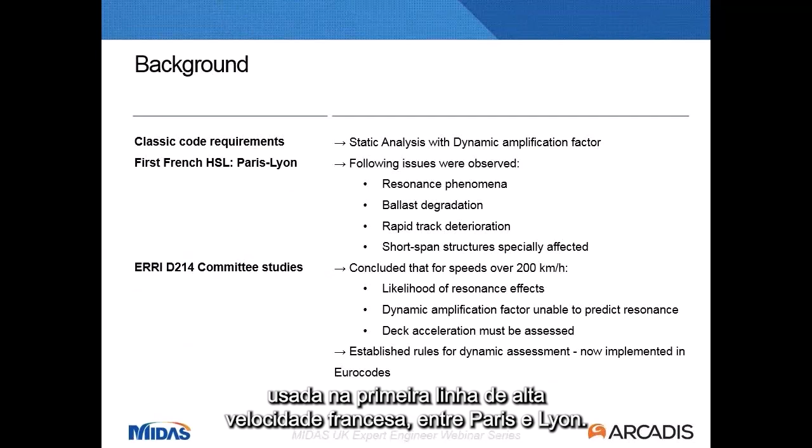This classic approach was the one used on the first French high-speed line between Paris and Lyon. When this line was put in service back in the 80s, some problems were observed in some of the bridges - they exhibited resonance phenomena, and the ones that did, it was observed that the ballast degraded very quickly. There was rapid track deterioration, and short span structures were the ones with more severe effects.

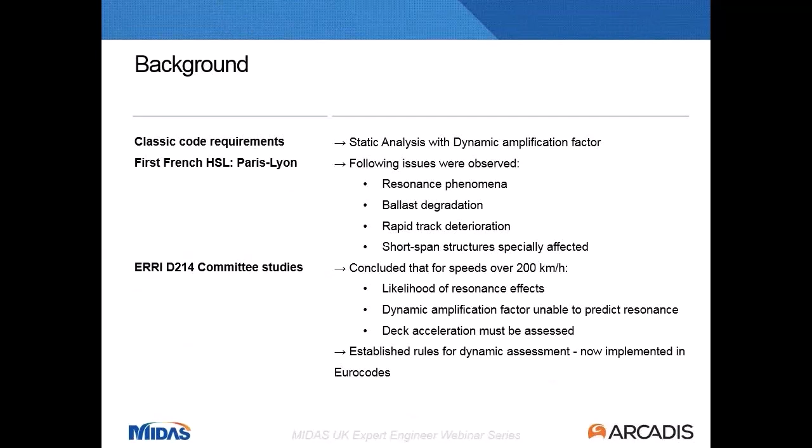In view of that, in a joint effort in Europe, a committee was constituted to study this problem. After running a series of studies and tests, they concluded that this problem is especially relevant for train speeds over 200 kilometers per hour - for speeds over this value there is a high likelihood that you will have resonance effects. And if that happens, using the classical approach of static analysis plus a dynamic amplification factor is unable to predict the resonance effects.

The other thing is that for these kinds of bridges, you need to check the deck acceleration. The committee also established a series of rules and guidance for doing the dynamic assessment of bridges, and these rules have now been implemented in the Eurocode. So what you see in the Eurocode is basically the conclusion of this committee on this particular problem.

What is the difference between when you have a line on ballasted track or on ballastless track? Well, these problems of resonance and deterioration manifest in different ways. If you have ballast, when the accelerations in your deck exceed 0.7 g, the acceleration of gravity, then the grains in the ballast lose the interlock between the grains, and they're not able to withstand horizontal and vertical forces anymore. If they don't withstand these forces, they are not able to keep the sleepers and tracks in place, and that leads to problems with track alignment, quick deterioration, and risk of derailment.

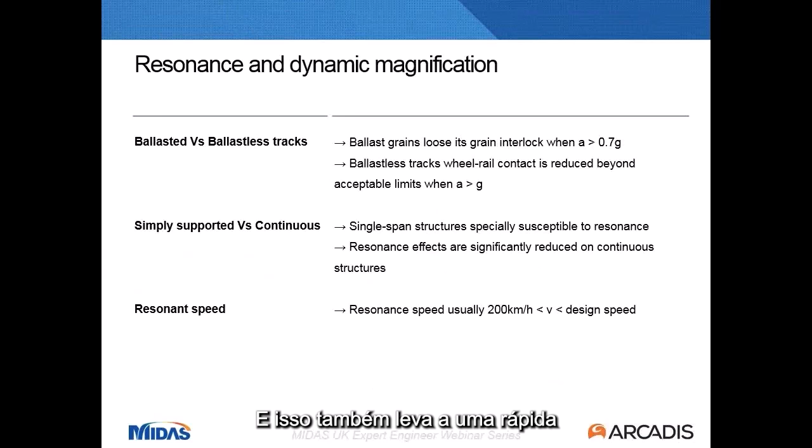But if you're using ballastless tracks, you don't have this problem with the ballast, obviously. But when the acceleration exceeds the gravity acceleration, then the contact between the wheel and the rail is lost, and that also leads to very quick deterioration of the track and as well to the risk of derailment.

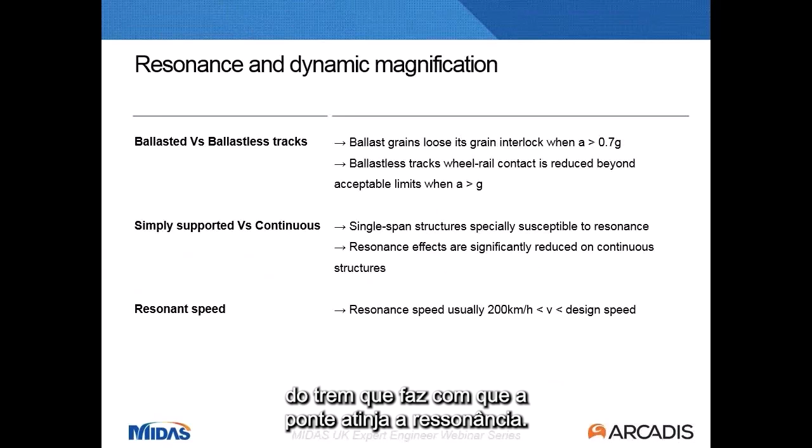The committee also concluded that there is a big difference between single-span structures and continuous structures. Continuous structures are able to reduce these resonance effects, but single-span structures are the ones that are severely affected. They also introduced the concept of resonance speed, which is the speed of the train that makes your bridge go into resonance. This speed doesn't necessarily have to be the high speed that your train can run over your bridge—it can be any speed between, let's say, 200 kilometers per hour and the design speed of the line.

Now, how has all this been established in the Eurocodes? I'm going to do a very quick review of the provisions in the codes.

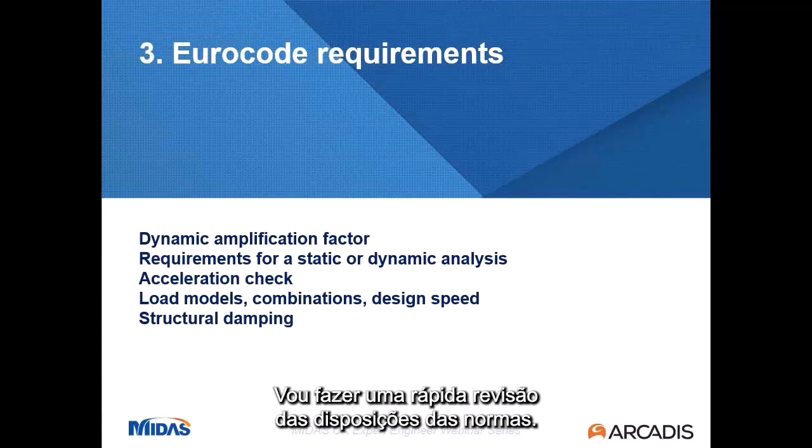So the first thing is about the dynamic amplification factor. The codes differentiate two different scenarios: one, when a dynamic analysis is not required, and another when a dynamic analysis is required. If it's not required, you can go with the classical approach. You check your structure with static moving loads, load model 71, model SW0, and if appropriate, you can use SW2. Then you multiply the results from this static analysis by the dynamic amplification factor.

That is a value that you can derive basically with parameters of track irregularities and a determinant length that depends on the element you are checking. If you're checking the main girders, it will have a determinant length; if you're checking some cross members, it will have another determinant length. With that, you're able to design your bridge without having to do any dynamic analysis.

But in some other cases, you do need to do a dynamic analysis. If that's the case, you still have to do your static analysis and apply this dynamic amplification factor. But additionally, you have to run another analysis—this is the dynamic analysis with different load models, the HSLM, the high-speed load models, and the real train that you're expecting to run over your tracks.

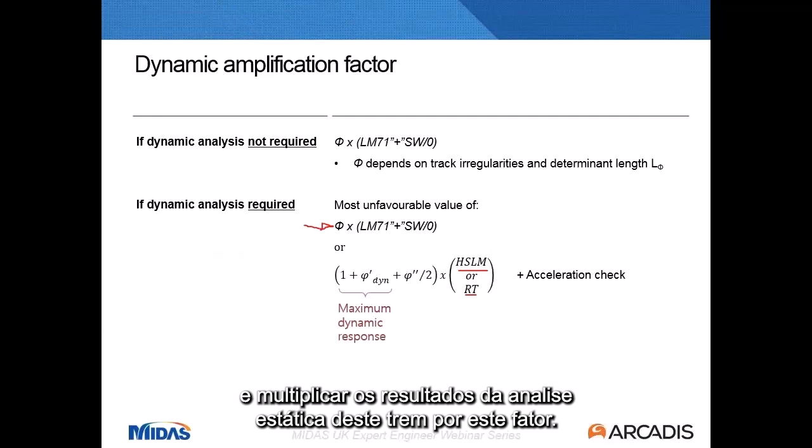That's a real train. Then you have to multiply it first by a value that is the amplification of forces and deflections due to the dynamic behavior of your bridge—this is the first term over here. And you have to multiply it by the maximum dynamic response. So you have to run a series of trains at a series of speeds, and take the most onerous one, multiplying the static results of these trains by this factor. You also have to include an additional parameter for track defects and vehicle imperfections in the equation.

So we have these two scenarios—when dynamic analysis is required and when it's not—but you might question now, how do I know if I need dynamic analysis? Well, the codes give you a nice flowchart like this one.

For the sake of brevity, I'm adding here just one flowchart from the UK annex, and that's the one for simple structures—structures that behave like a beam element between supports. There is another similar flowchart for complex structures, ones that do not behave as a beam between supports but have, for instance, grillage or orthotropic behavior, cable-stayed, or other more complex structures—you have to use a different flowchart. But this flowchart gives you some criteria to define if you will need a dynamic analysis or not.

Later on in this webinar, I will introduce a case study, and for this particular case I'm going to show you how to use this flowchart and determine if you need this dynamic analysis or not.

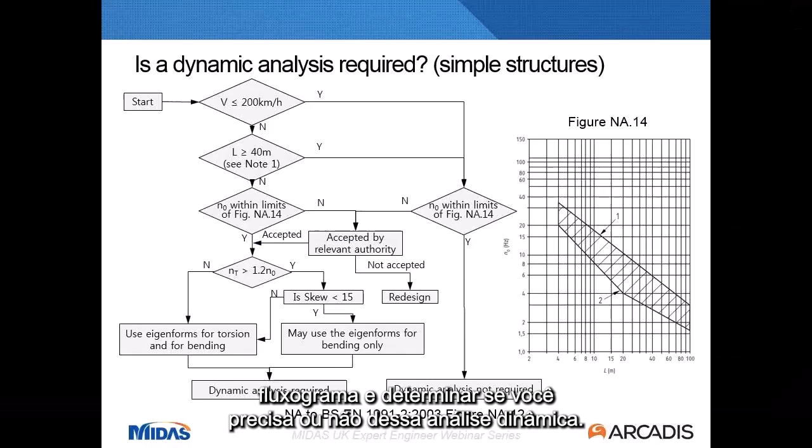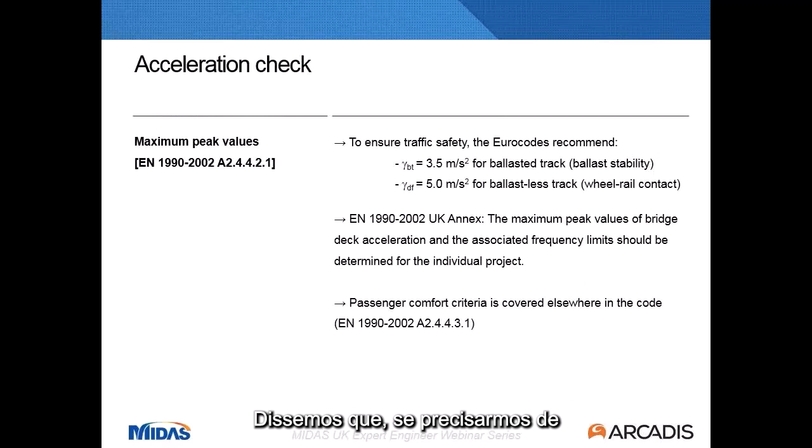Right. The accelerations check. We have said that if we need the dynamic analysis, we have to check the maximum values for the dynamic results, but we have to check acceleration as well. And which are the limiting values that the code imposes?

Well, the code recommends a couple of values, different values if you're with a ballasted track or a ballastless track. If your track is on ballast, the maximum acceleration that you can allow in your deck is 3.5 meters per square second. And that's to make sure that you don't have any problems with the stability of your ballast. That's basically the 0.7 G that we have seen previously with a factor of 2.

If it's a ballastless track, then you should use a maximum acceleration of 5 meters per square second. And in this case, is to ensure that the contact force between the wheel and the rail doesn't reduce beyond acceptable limits.

But these two values are recommendations from the Eurocode, and the UK annex from the Eurocode tells you that these values should be determined per specific project.

And another thing I think is worth mentioning is what we are talking here about is this amplification problem and the problems with safety and track deterioration if accelerations go beyond some limits. We're not talking about passenger comfort criteria. Passenger comfort is covered somewhere else in the code.

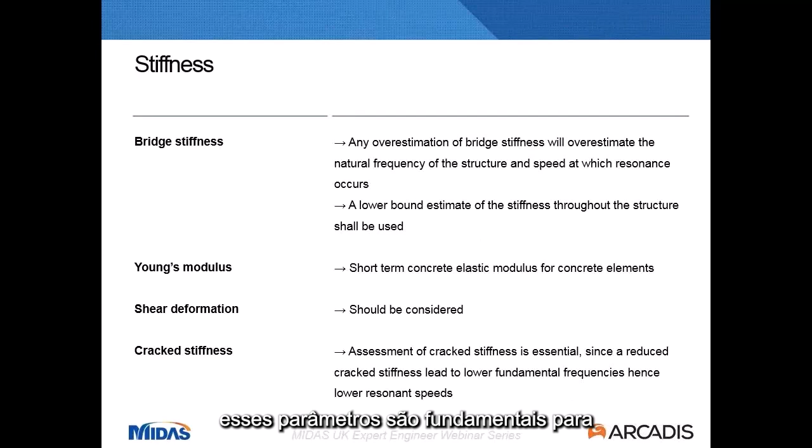Okay, let's jump now to main parameters for our analysis. That's stiffness and mass. As you probably know, these parameters are key for any dynamic analysis that you're going to perform.

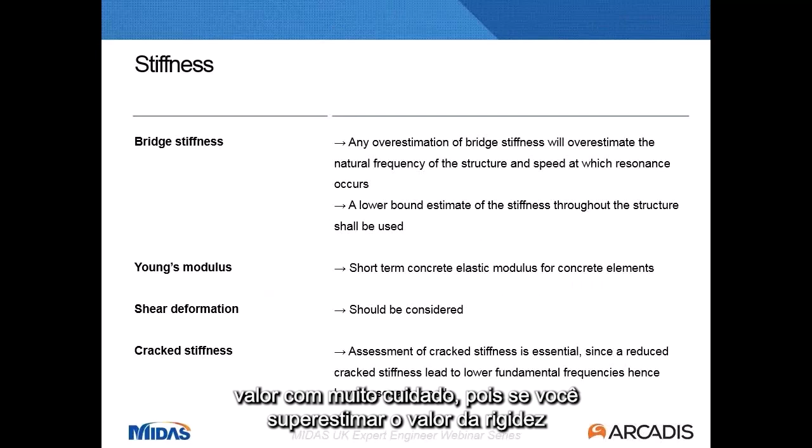And in this case, bridge stiffness, you should consider this value very carefully, because if you overestimate the bridge stiffness, then you overestimate the fundamental frequencies of your bridge, and you will overestimate as well these resonance speeds, and you may miss resonance phenomena. You might be underestimating the forces on your bridge, and that puts a risk in the safety of your bridge. So it's very important that you use a lower bound estimate of the stiffness.

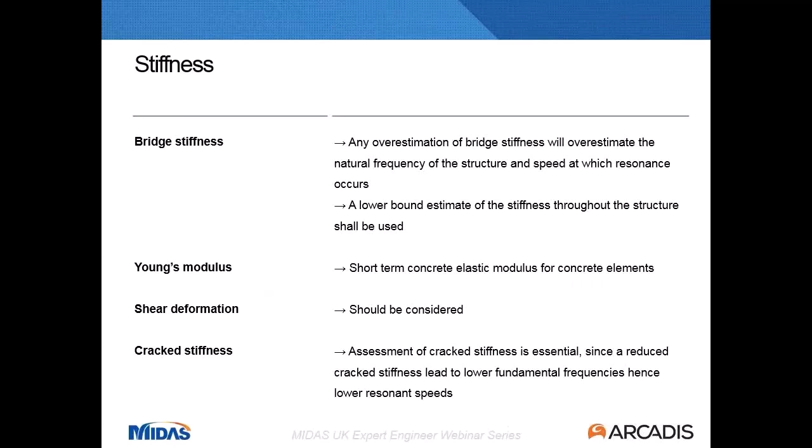Things like shear deformation, you have to make sure that you're considering shear deformation if you're using beam elements. And if you're using concrete structures that you allow them to crack by design, like a composite structure that you expect the top slab to crack near the supports, you need to model the cracked properties in your dynamic model. You cannot use gross properties, because then you will underestimate the resonance effects.

When we are talking about mass, then it gets a little bit more complex because you need to consider lower bound and upper bound of mass. The lower bound will help you to estimate the maximum accelerations in your bridge, and then when you're using the upper bound, that's gonna help you to define the lowest speeds that you can get resonance in your bridge.

So you have to run two different scenarios with two different masses to make sure that you're covering every possible situation.

For instance, in this upper and lower bound, when you have a ballasted track, you have to consider two scenarios for the ballast. One scenario is when your thickness of ballast is the minimum allowable in your bridge, and the ballast is dry and clean, so it has a lower density. And the other scenario is when you have an extra thickness in your ballast to allow for track lifts. So thickness is greater, and then you have to consider dirty ballast with a saturated density.

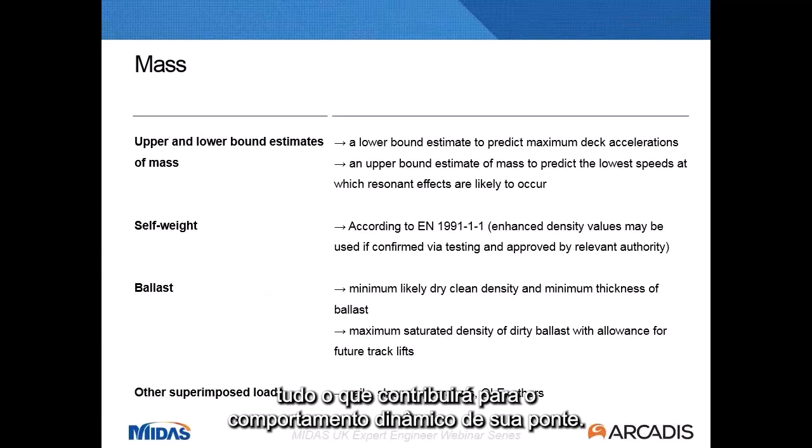And these two different values are going to give you the two different bounds for your mass. You also have to make sure that you're considering masses for everything that goes on top of your bridge, and that's the rails, sleepers, parapets, overhead electrification, everything that will contribute to the dynamic behavior of your bridge.

Okay, so after this basic introduction, let me introduce this case study. This is a very simple case that I think it's useful for understanding the basics of how to run this dynamic analysis. It's basically a 30 meter bridge, single span concrete box with the dimensions that I'm showing right now.

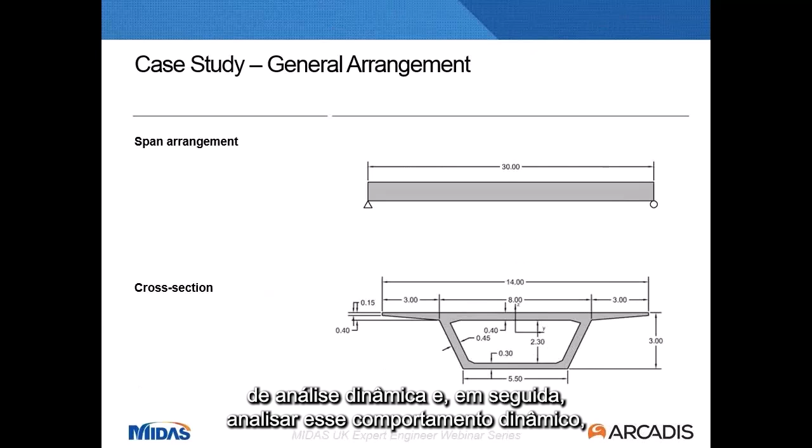So if we want to first check if we need a dynamic analysis and then analyze this dynamic behavior, the first thing that we have to do is go to this flowchart.

And you start by checking the speeds. In this case, we are assuming that's a bridge on a high-speed line with speeds up to 400 kilometers per hour. So we have to go down. We said that it's a 30-meter single-span bridge, so that's down again.

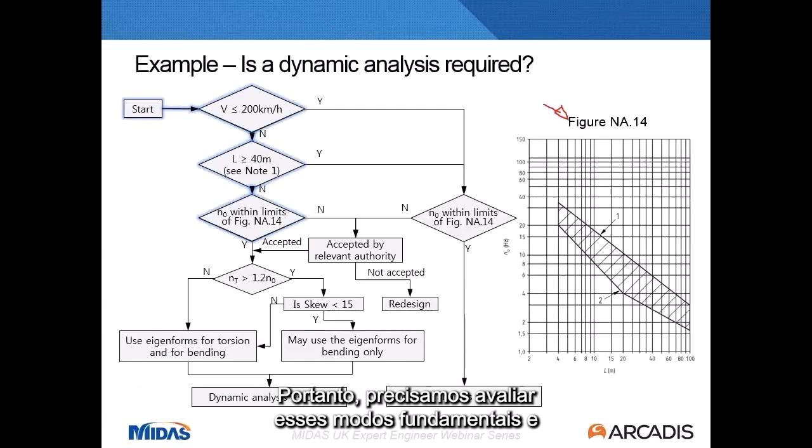The next check we have to do is to verify if the fundamental frequency is within the limits of the figure from the national annex NA.14 — that's the figure I just introduced on the right-hand side. So we need to assess these fundamental modes and fundamental frequencies to see if we are within limits or not.

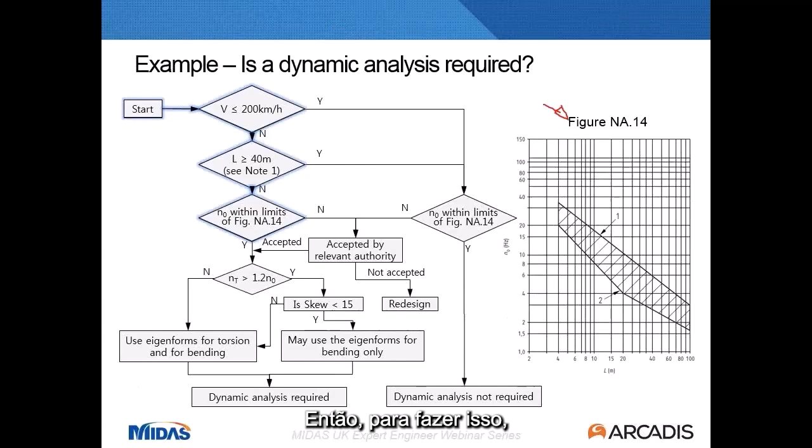So to do that, I've prepared a model like this one, a very simple one. It's basically a beam element representing this concrete box, 30-meter span, and I've subdivided the beam element with nodes every half a meter. My boundary conditions are simply supported on both sides, rotationally fixed because I'm assuming there are couples of bearings at each support, and the axial load is fixed on one of the ends. Just to show more or less how that looks, that's this section, and that's a 30-meter simply supported span.

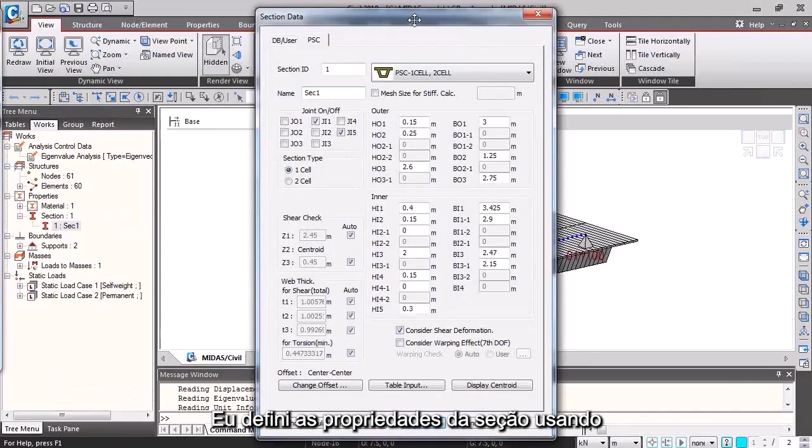I've defined the section properties using this menu in Midas, where you can define the sizes for a concrete box. It's very important that you tick this box to consider shear deformation, to make sure you're not overestimating the stiffness of your bridge.

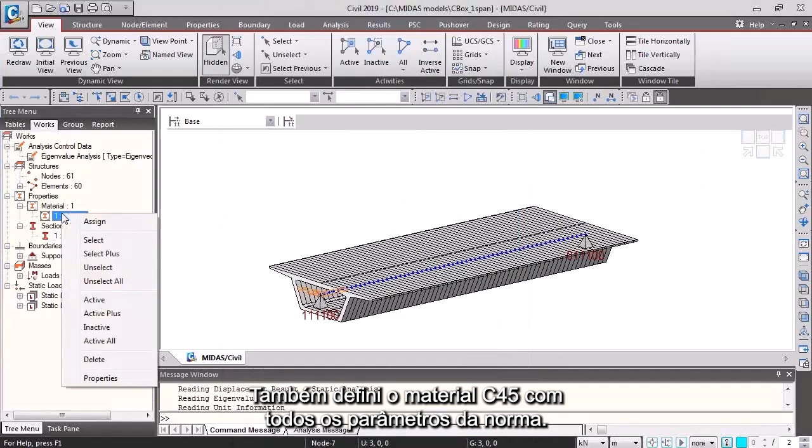I've also defined the material, C45, with all the parameters from the codes. And then I've included first all the loads that I have on top of the bridge: ballast, sleepers, track, parapet, everything else. I've represented that as a load.

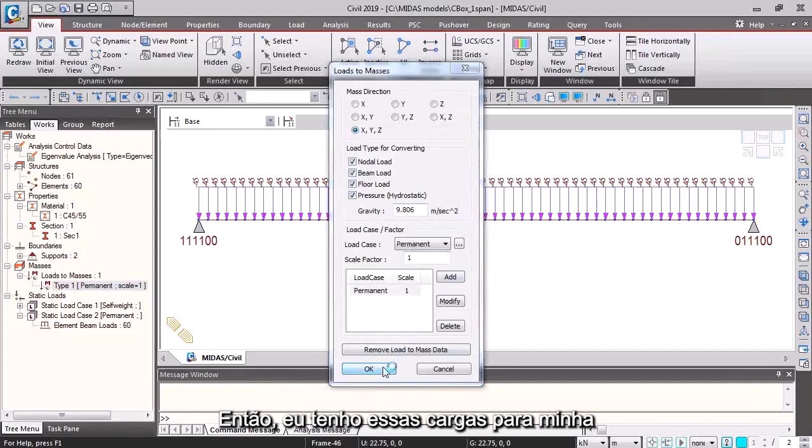But since I have to run an eigenvalue analysis, I converted that to a mass by using loads to masses. So I'm converting every kind of load that I have — in this case, it's just a beam load — and all the directions are very important, with a factor of 1. So I have these loads considered as a mass for my eigenvalue analysis.

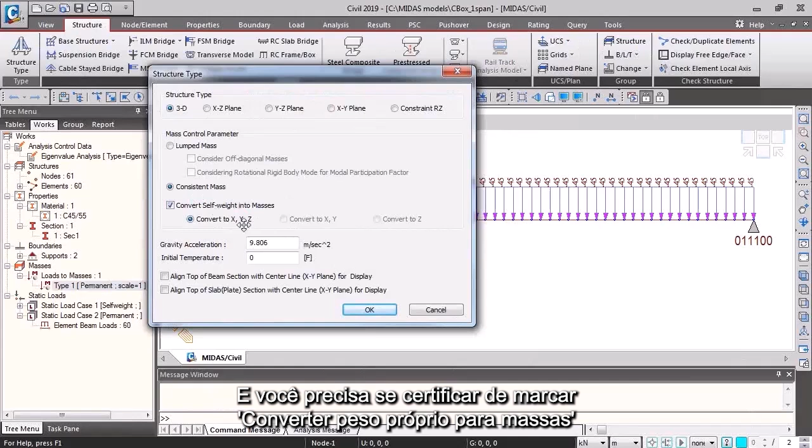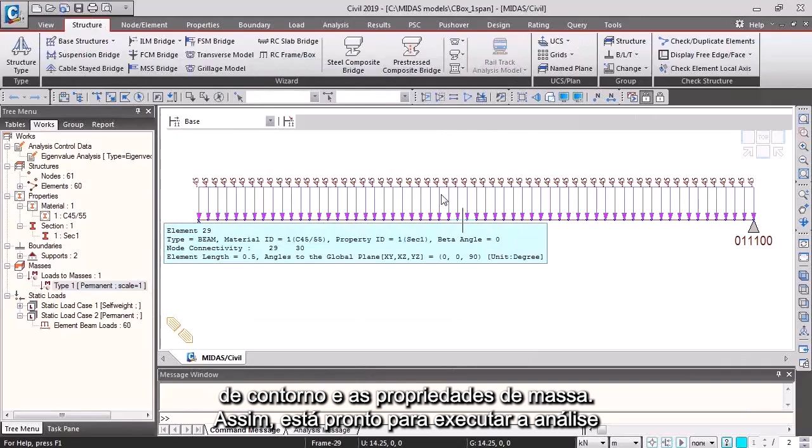The other thing I have to make sure of is that I'm considering the mass of my concrete box. To do that, you have this menu in structure and structure type, and you have to make sure you're ticking to convert the self-weight into masses, to be used in all 3 directions. With that, I have a model that has the stiffness properties, boundary conditions, and mass properties, so you should be ready to run a dynamic analysis.

Eigenvalue analysis to get the fundamental modes. If you go to results, mode shapes, vibration mode shapes, you can check which are your results. For instance, for the first mode you'll have something like that — that's vertical bending.

I'm gonna just change it a little bit — so something like that. Mode number 2, that's horizontal bending. That's the view from the top of the bridge, and you can see how this mode makes the bridge bend laterally.

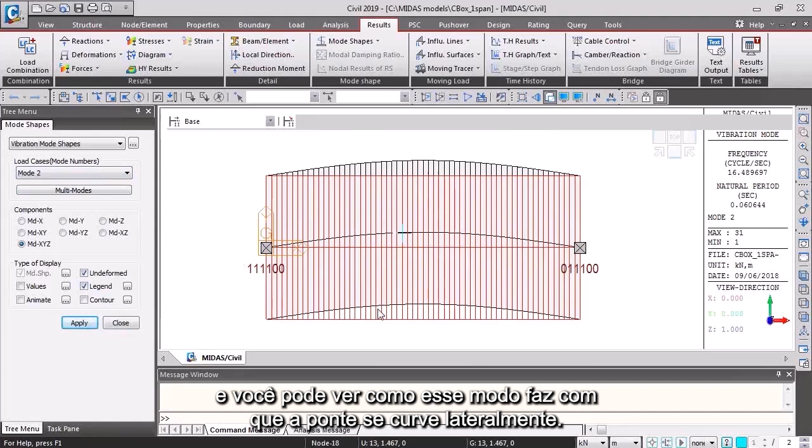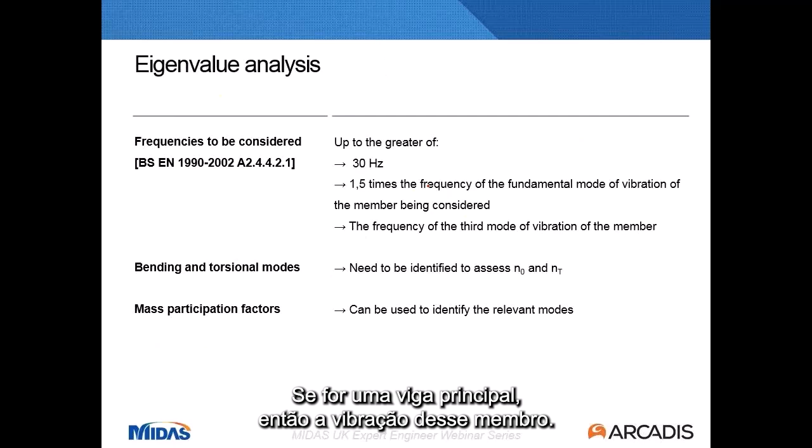But if it's a cross member, or a cantilever, or another secondary member, you have to consider the fundamental frequency for that specific member, or at least 3 vibration modes for the member you're designing. In this case, we have this main member that is acting as a beam because it's a very simple structure, this concrete box.

Next check is whether the first torsional frequency is greater than 1.2 times the first bending fundamental frequency. Going back to our results, the first bending frequency was 6, and the first torsional was 20, much greater than 1.2 times the bending one. So that's a yes, we can continue.

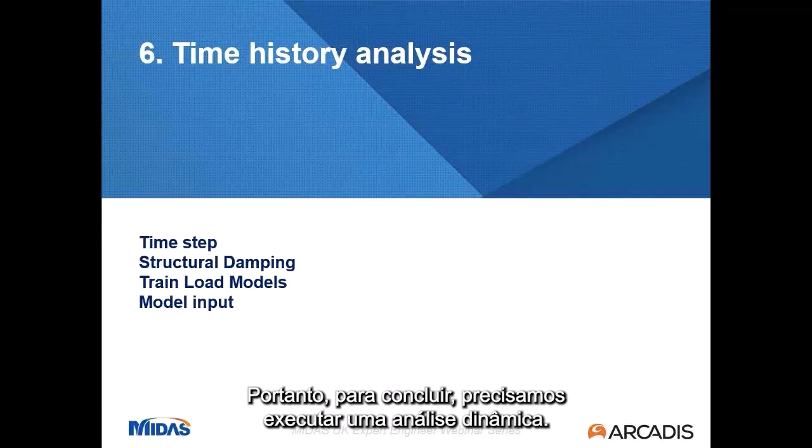So, conclusion: we need to run a dynamic analysis. How do we do that? First, which kind of time history analysis do we need to run? Is it a linear or a non-linear analysis?

Usually the structures you will be designing, you expect to behave in the linear range when applying the live load. So you should assume that you will analyze the structure within the linear range.

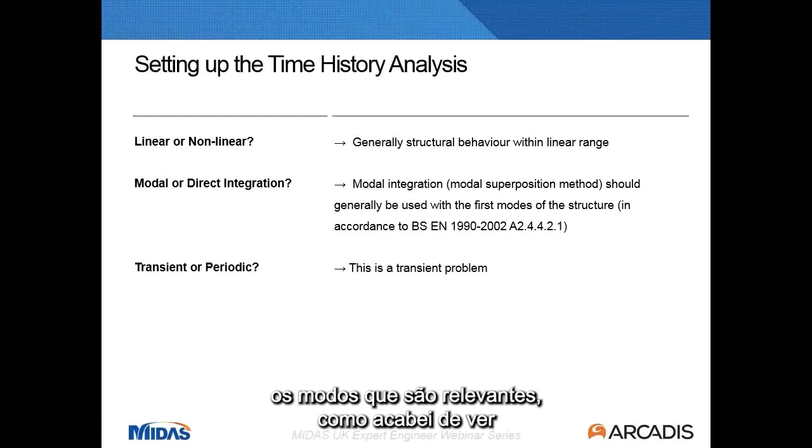What else? Time step - which time step should we use? For the time step, there is no recommendation in the Eurocodes, but the report that this committee prepared, which I've already introduced before, gives a series of recommendations for the maximum time step you should use.

You should use the minimum time step of four values. These formulas depend on the frequencies extracted from your eigenvalue analysis, the span of your bridge, the fundamental frequency, and the last of them is that you shouldn't use a time step over 1 millisecond.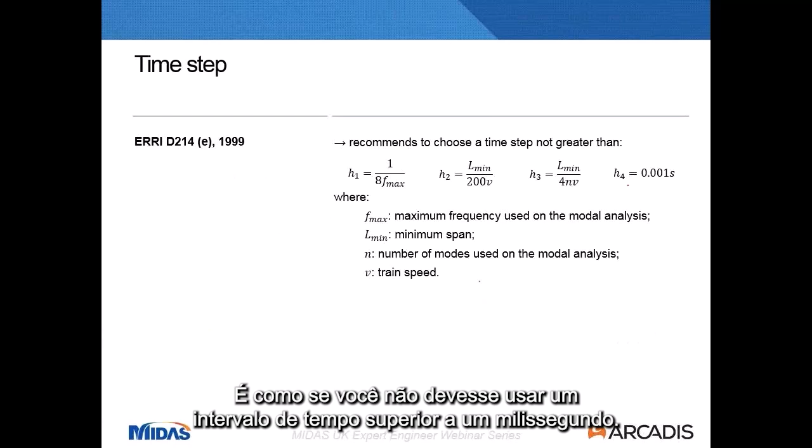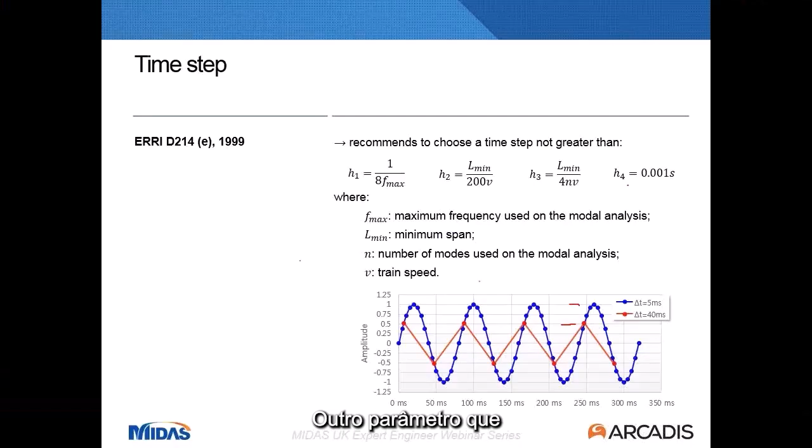Another parameter we need to set up this time history analysis is damping, and the Eurocode gives some recommendations. The damping values depend on the span of your bridge, and on whether it's steel, composite, pre-stressed concrete, or reinforced concrete.

The last thing is the loads that we should use. The Eurocodes introduce different loads. The first set of loads is for doing this acceleration check and extracting the dynamic amplification factor, and there are different load models. The first load model is HSLM-A, which is a set of 10 different variations of load model, like the one shown in the figure here.

Basically, it's a series of coaches with axle loads. The variations come from changing the axle spacing, the length of the coach, and the number of coaches used. The purpose of having these 10 variations is to cover all possible situations, all possible trains running over your bridge.

For simple structures and spans less than 7 meters, you have another load model, that's HSLM-B, and the other load model that you have to run is the real train.

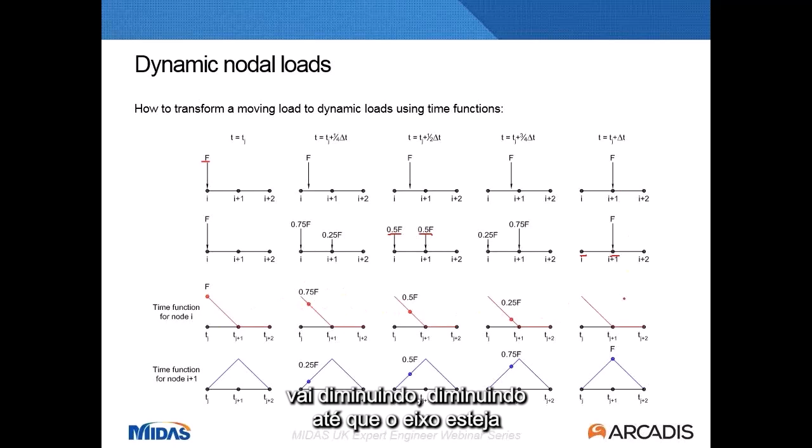This is represented as these time functions. It's a time function that has the value of f when the time is equal to j, and when time starts to increment, it goes down until the axle is on top of the next node, and then it's 0. This is for the first node I, and for the next node I plus 1, it's a very similar function, but it starts with 0 and increases until the axle is just on top of this node, where you have 100% of the force applied.

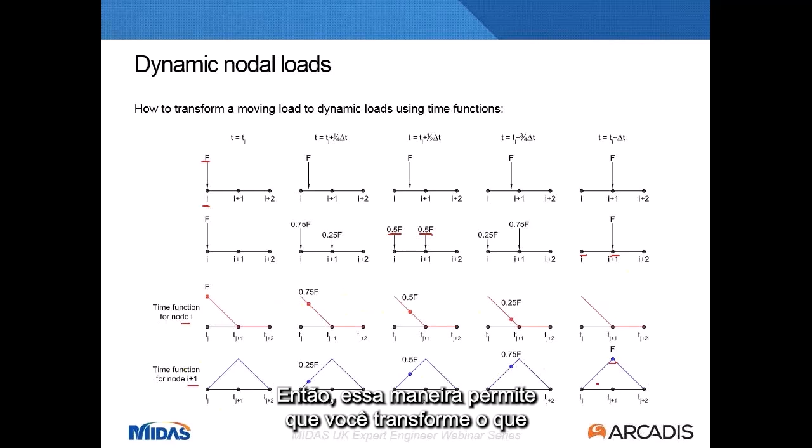So this way allows you to transform what is a moving load to dynamic nodal loads.

Okay, that's for one axle. What happens when you have a series of axles? That's your load models from the Eurocodes.

Well, if we are trying to get a time function for this first node for a full train, then we run the train on top of your bridge, and every time an axle just steps over your node, you will have one of these peaks here. That stands for the first node.

What happens if you want to extract the time function for another node? Well, the time function is exactly the same, but with a delay compared with the first time function. This delay is just the time that it takes the train to get from the first node in the bridge to the node in question.

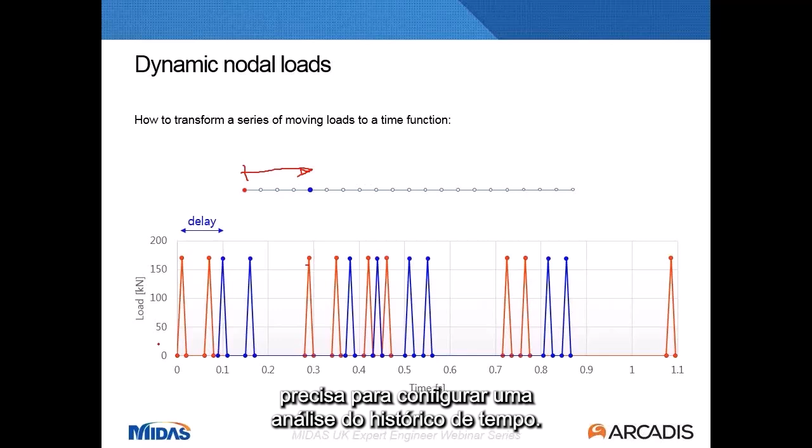Okay, so with all this, you have all the information you need to set up a time history analysis. So what I'm going to do is go back to my model, and I'm going to start setting up this time history load case.

So first thing, in loads, dynamic loads, and load cases, you're going to set up your time history load case. I'm going to call it test. I'm going to run this test train at 300 kilometers per hour.

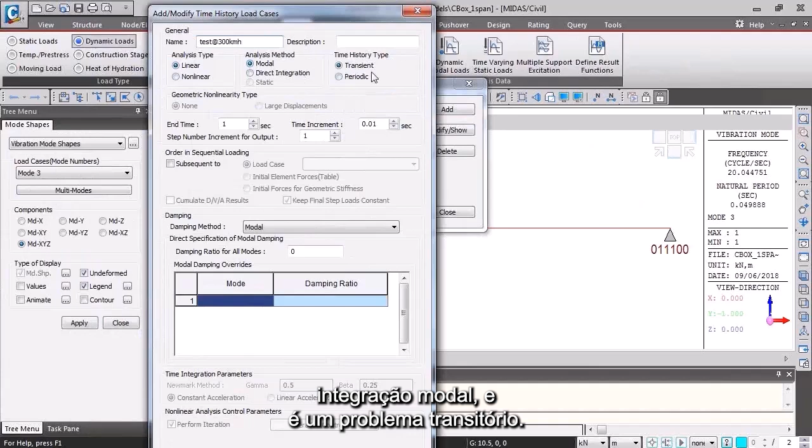As we said, this is a linear case, modal integration, and it's a transient problem. The time increment is 1 millisecond, and the damping ratio, if you check the codes for a pre-stressed concrete structure, is 1%.

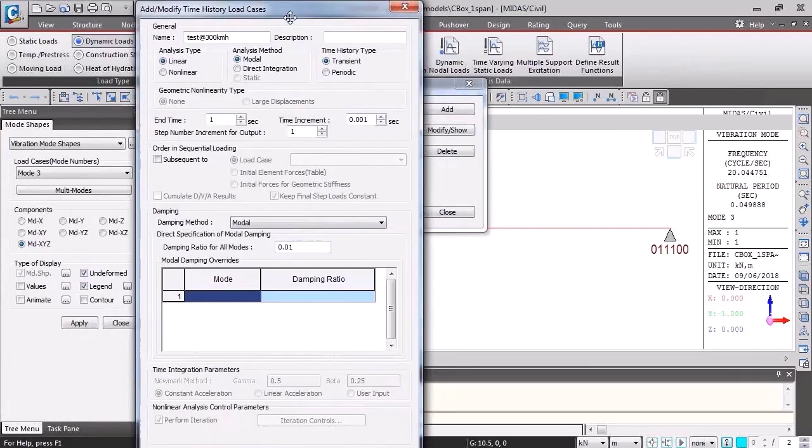Right, with this, you have set your load case. Next thing is to set up, to describe the time function. And then we go to load again, and time history functions, and add time function.

And then I'm going to create a time function under the same name, test train at 300 kilometers per hour. I want this time function to describe a force. And we want to use this graph that we have just shown in the presentation. I want to introduce that to my model. So how can we do that?

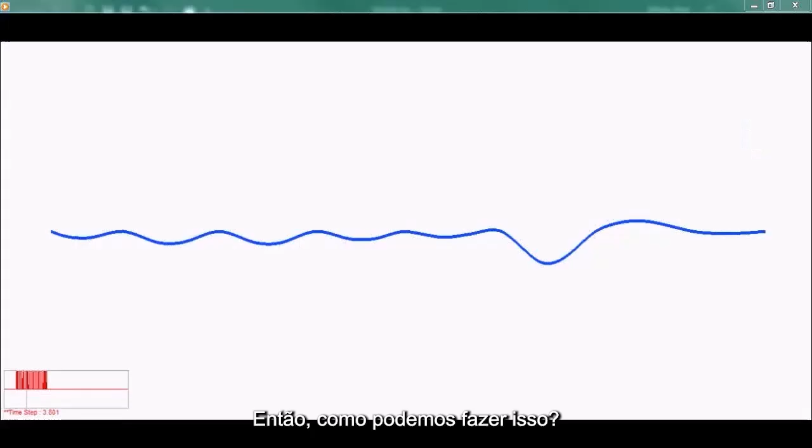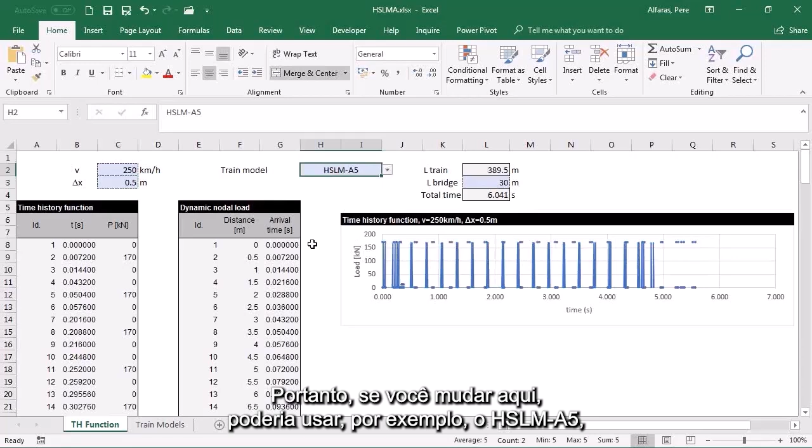Well, what I've done is prepared an Excel spreadsheet that takes every load model and transforms it to a time history function using the train speed, the spacing between nodes, and the train model. So if you change here, for instance, to use HSLM A5, this time function for the whole train is going to change. If you use another speed, everything will update for that speed, or if you change the spacing between nodes, that will change the time it takes the train to go from one node to the other.

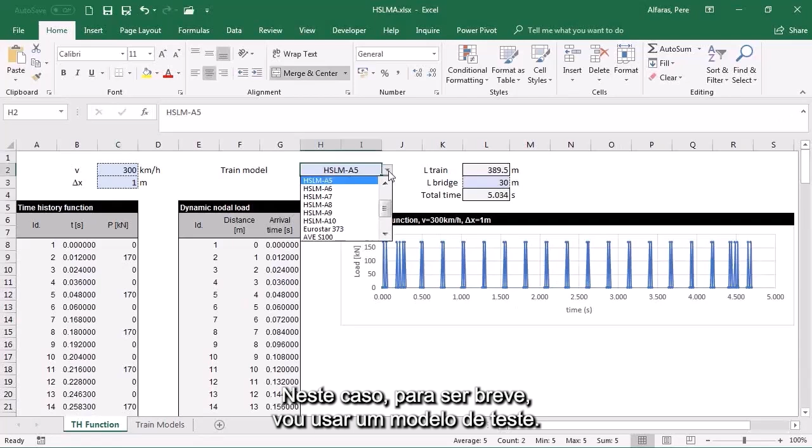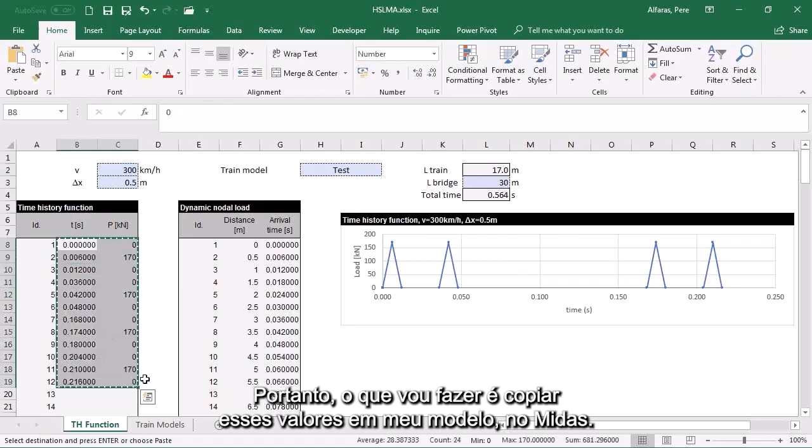For this case, to make it brief, I'm going to use a test model. My spacing was 0.5 meter, and I was aiming for 300 kilometers per hour train speed. So I have this time function, the one plotted here, and the values are in this table. What I'm going to do is copy these values into my MIDAS model. I'll first prepare the rows, inserting arbitrary values, so I can then copy and paste.

Right, so you can see here that you have the time function that we had on the Excel spreadsheet as well. So we have the time function. Fine, we have the time history load case, we have the time functions.

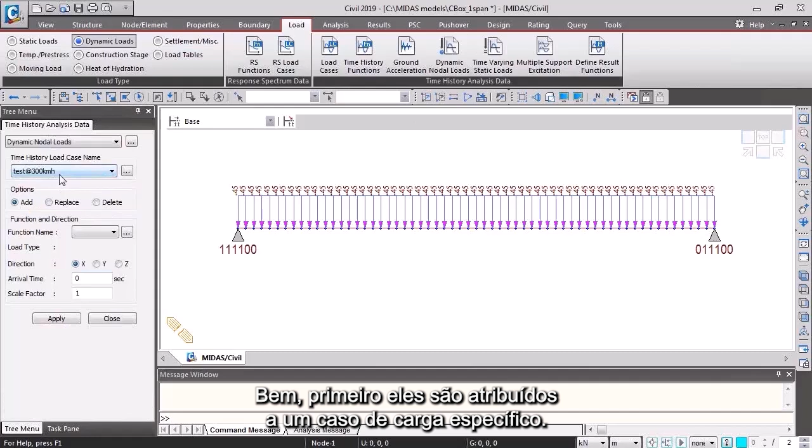What else? Well, the next thing to do is the dynamic nodal loads. How are they described in MIDAS? First, they're assigned to a specific load case, this test at 300 kilometers per hour, the one we want to run. Then they are assigned to a specific time function, the one we just described, that time function for a force. And this force is going to be in the Z direction, with a factor of -1 because it's going to point downwards.

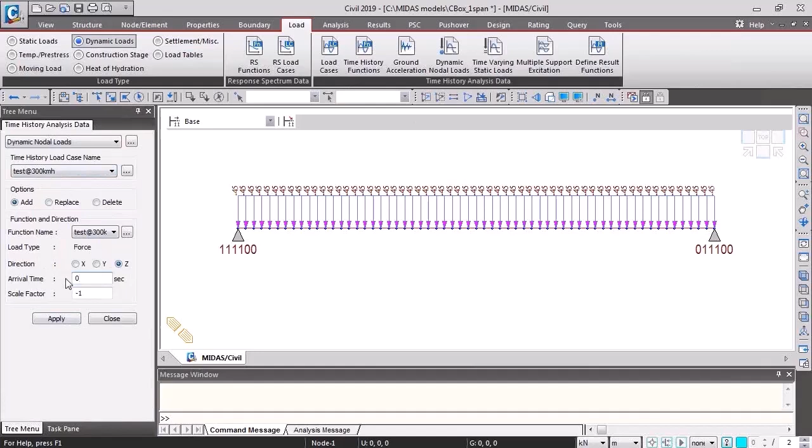And which node we should apply it to. We have this factor, and there is another value we have to insert: the arrival time. The arrival time is the time between the start of your analysis and when your time function starts applying to your node, and that's the delay we introduced before, the delay between the first node and the node you're considering.

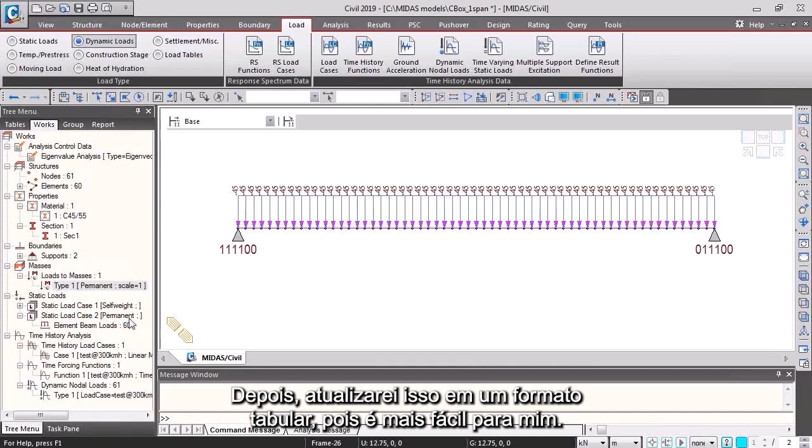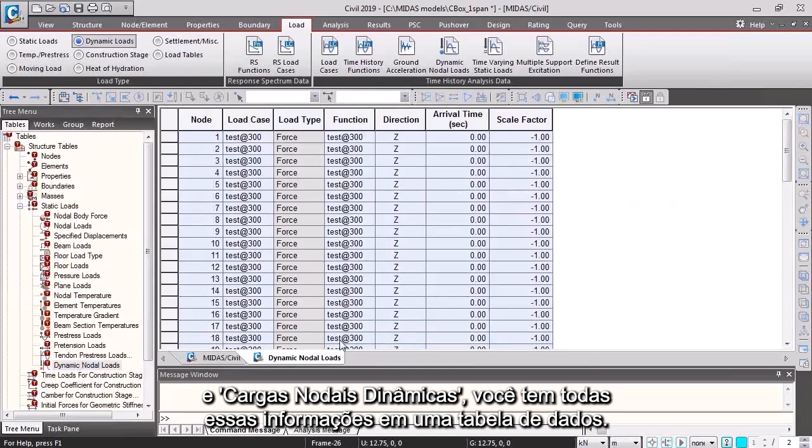So to do that, first I'm going to select all my nodes and assign them this dynamic nodal load case with an arrival time of 0. Then I will update that in a tabular format, because it's easier for me. If you go to tables, static loads, and dynamic nodal loads, you have all this information in tabular data. And in my spreadsheet, I have this arrival time as well, so I'm going to use that, copying my arrival time into my MIDAS model.

Okay, so for the first node, arrival time is obviously 0 because the train starts here when the analysis starts. For the second node, you can't quite see it since there are only 2 digits, but it takes 6 milliseconds to reach, 12 milliseconds to reach the third node, etc. So we have everything in the model. Now you can close it, and if all your inputs are right, you can just run the analysis and you will get the results.

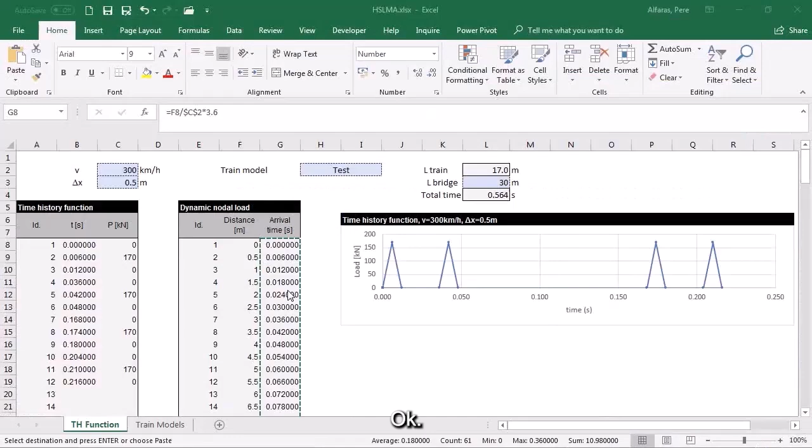I'm going to jump back to the presentation now and go into the next section, results interpretation. That's very important for a couple of reasons. First, you want to make sure your analysis is right. Secondly, you need to be careful when extracting the results, so you're getting the peak values for forces, deflections, and accelerations.

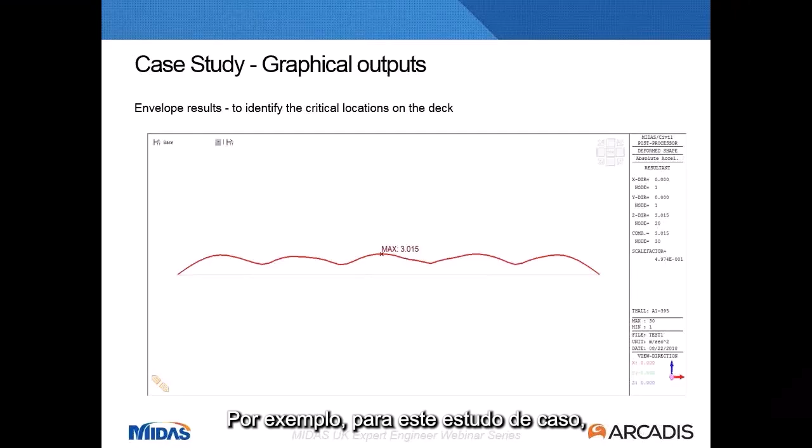For instance, for this case study, the model we're performing, we can extract values as envelopes. I'm going to show that directly in our model. To be quick, I have the same model with all the different trains and speeds already analyzed, so the results are ready and you don't have to wait for the model to run all these cases. So if you want to check accelerations for a specific load case, you can go to deformations, deformed shape.

When you're checking the results here, you'll notice that you have all the different time history analysis, similar to when you're running envelopes. You have maximum values, minimum values for this time history load case, the A1 at 180 kilometers per hour. So if you want to check the peak acceleration values for load model A1 at 300 kilometers per hour...

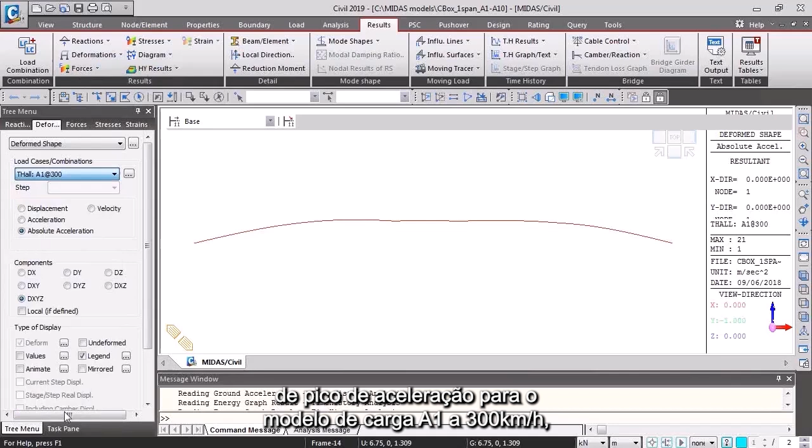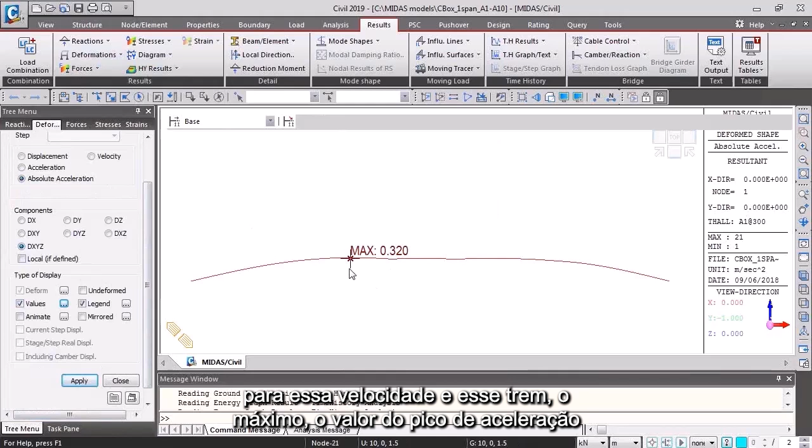I need to check this load case, absolute acceleration, and I'm interested in all directions. I just click on values and click OK. So this is the envelope of accelerations. For this specific load case, speed and train, the peak acceleration value is not at midspan, as you may think would be the obvious case, but at this node, which is 1/3 of the length—node number 21.

Another thing you can do to extract results, instead of getting envelopes for a specific load case, is use a time history graph. This gives you results for a specific node—I've selected node 21—specific output, in this case acceleration in the Z direction, and for a specific load case, the train A1 at 300 kilometers per hour, I can just plot the results.

This is how the acceleration looks plotted against time. It starts at 0, obviously, and starts oscillating in forced vibration. Somewhere here, around 5 point something seconds, the train leaves the deck, and then you have free oscillation of the deck, and since you have a damping value, this fades away.

It's very important that you check this kind of graph because you want to make sure you've run the model long enough to capture all the time the train is on top of your bridge—that's when you'll have the peak values. If you just run this model for 2 seconds, maybe you're missing one peak value here at 4 point something seconds when the train is still on top of your bridge.

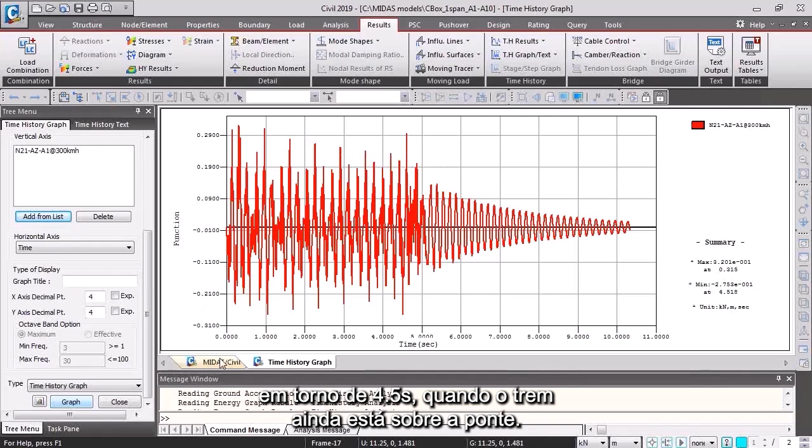You can plot that as frequencies as well, and that will help you understand which frequencies are more excited and if that makes sense. Usually, lowest frequencies mean you need less energy to excite the motion of your bridge, so those are usually the ones with greater contributions. If you look at that and everything is 0 for the first frequencies, but then mode number 80 contributes to the whole vibration, maybe something is wrong—or maybe it's fine, but it's worth checking that the results make sense.

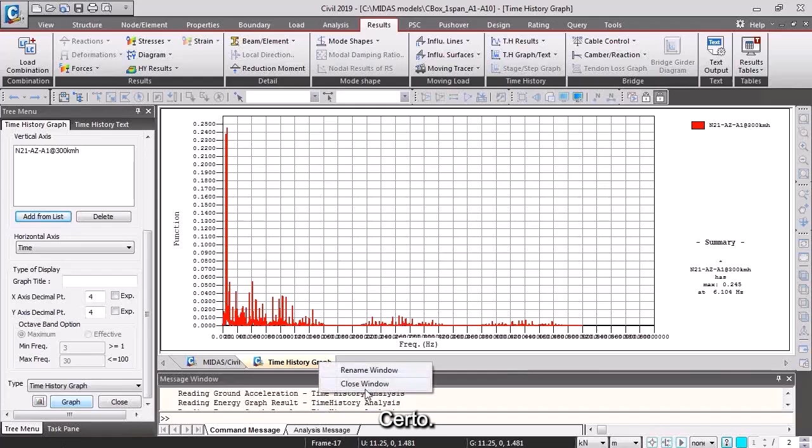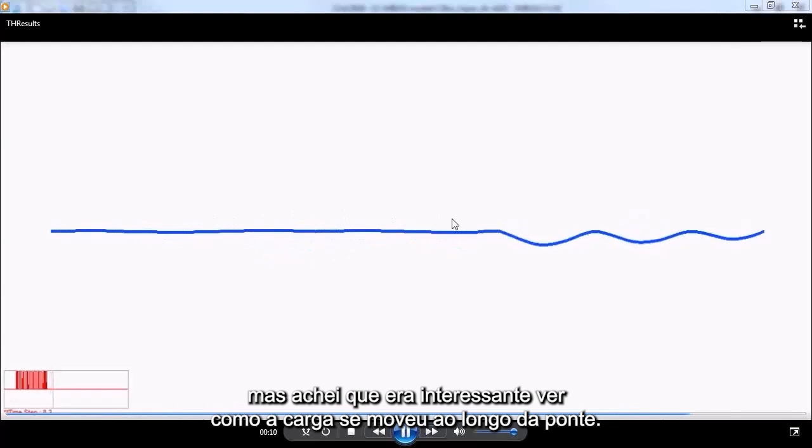Another thing you can do is extract results as a video, which also helps you see how the train and bridge behave. This isn't the same load case study—it's a multi-span bridge—but I thought it was interesting to see how the load moves along the bridge, and then you can see all the flexions. It's useful as well to see if you have any spurious results or something wrong—you'll spot it very quickly in the video.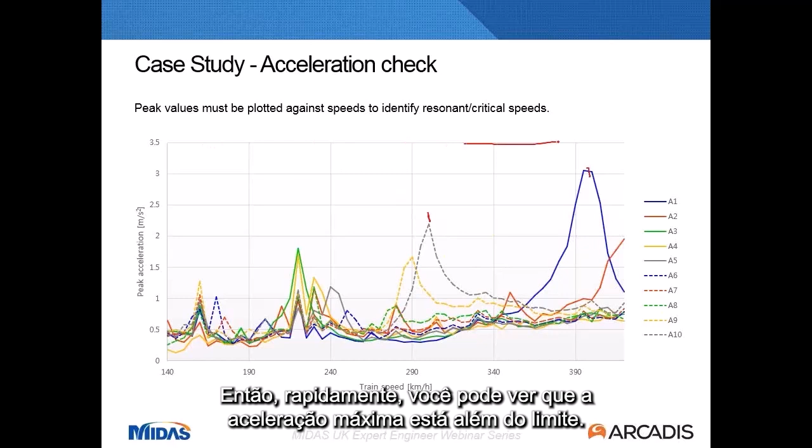In this case, we've assumed it's a ballasted track. So quickly you can see the maximum acceleration is below the limit—the limit is 3.5 here. So we are fine; there are no safety problems with track deterioration or derailment.

You also need to check other outputs like every force and deflection needed for your bridge. You have to check your dynamic results and see if they are more onerous than your static load case. So what you can do is plot the dynamic results against speed, like this—this is the bending moment at midspan—and then in the same graph plot the results for the static analysis multiplied by the dynamic amplification factor.

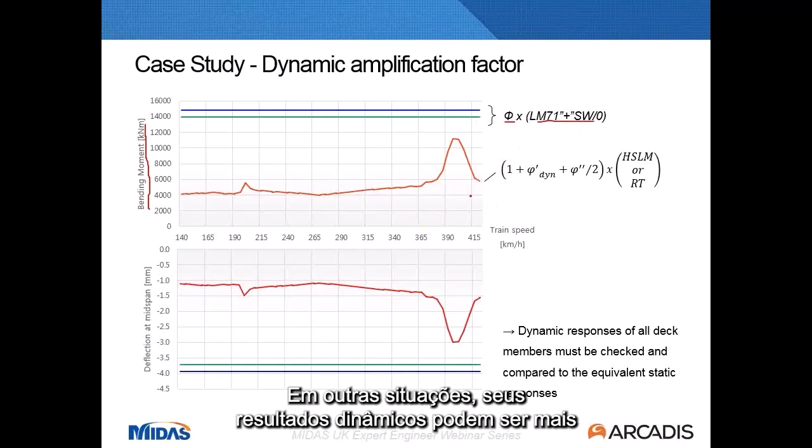So in this specific case, this static load case and this factor is most onerous, so you can use that for designing your bridge. In other situations, your dynamic results might be most onerous, and then you have to use them to design your bridge.

Okay, so I'm already hitting my hour, so I'm going to be concluding now, talking about resonance and dynamic magnification.

It's very important to understand that it's especially relevant for speeds over 200 kilometers per hour, so high speeds, and short span structures are particularly prone to this problem.

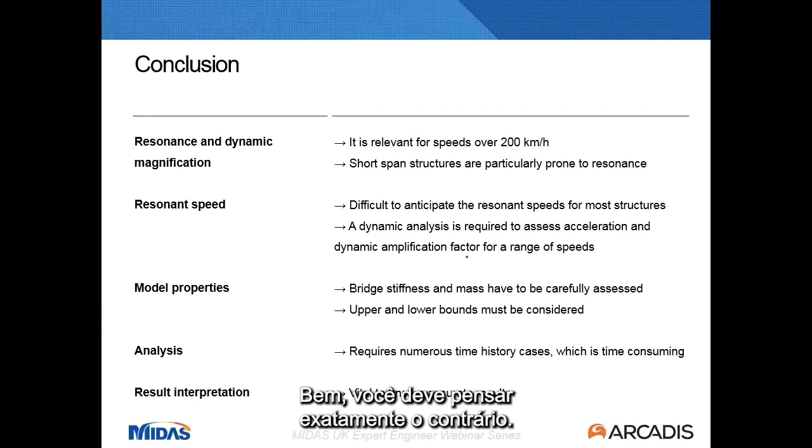I've had discussions with colleagues asking me, well, should I worry about my bridge? It's a tiny bridge, very short span, so I don't think that can be a problem. Well, you have to think just the opposite. If it's a tiny or small bridge and it's a single span and simply supported, then it's really susceptible of having this problem.

The resonance speed is difficult to anticipate for most structures. If you have a single span structure, you can use analytical formulas, but when you have a change of stiffness along the bridge, or a grillage model, orthotropic, or more complex bridge, it's very difficult to get any feeling of which is the resonance speed unless you run this dynamic analysis. To really capture the resonance speed, you need to run a series of analyses at different speeds, like 140, 150, 160, identify which are the areas with more resonant results, with greater amplitude, and then refine the speed step over this area to get the resonance speed.

Model properties, very important to check very carefully: mass and stiffness, and use upper and lower bounds.

The analysis requires numerous time history cases. If you have like 10 trains from A1 to A10, and you have to run from 140 to 420 kilometers per hour every, let's say, 10 kilometers per hour, that's a huge amount of load cases to run, like 400 different time history load cases. Every time history load case takes a while, so 400 of them takes much more.

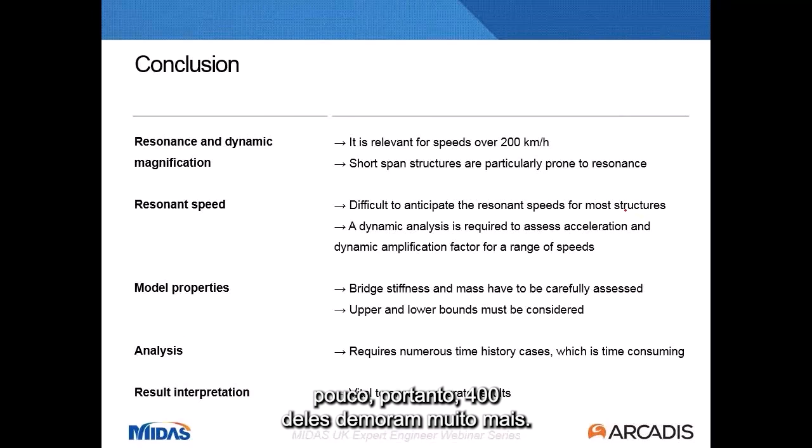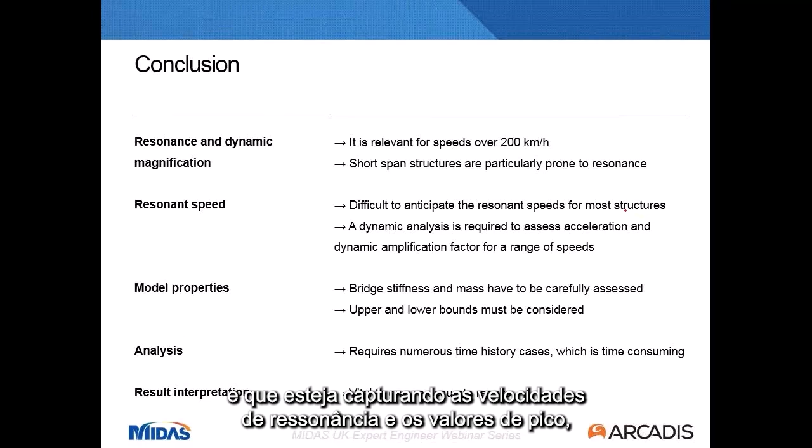Last thing, result interpretation is very important. You carefully check your results, make sure that they make sense, and that you're capturing these resonance speeds and the peak values, so you're designing your bridge to the most onerous effects.

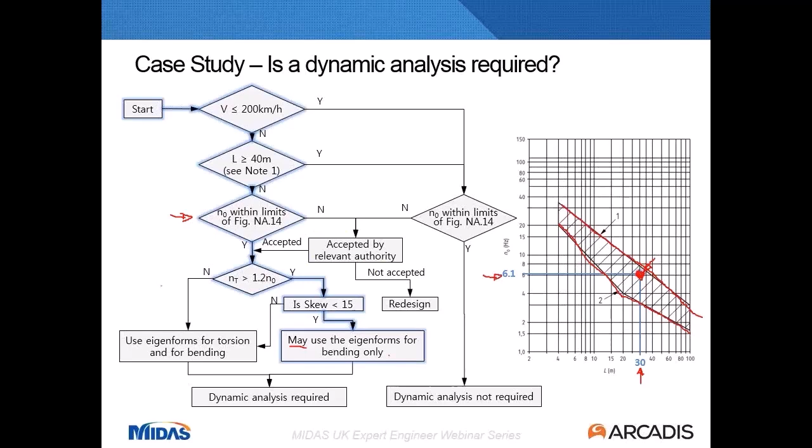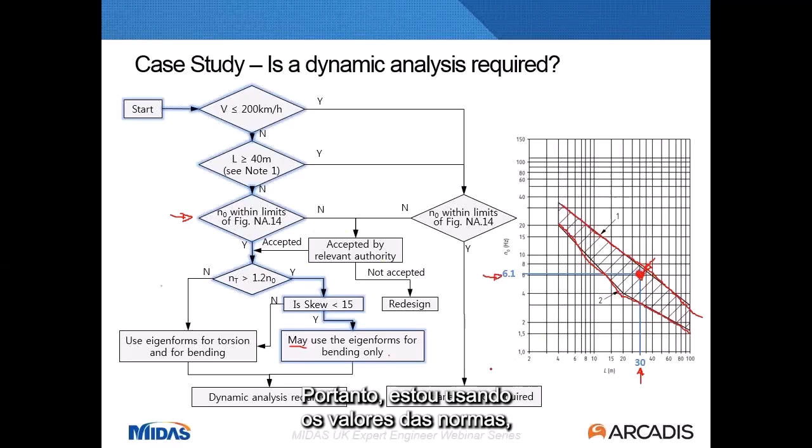Which structural damping is better for dynamic analysis, modal damping or mass and stiffness proportional damping (Rayleigh damping)? Will there be a considerable difference in response based on the damping method chosen? My experience is when you're designing a bridge without any monitoring results of the structure, you won't have values that allow you to differentiate which damping ratio applies to mass and which applies to stiffness. The codes give you values for modal damping, so that's generally what should be used for a new structure. Another situation is if you're assessing a bridge you're able to monitor—then you can assess the damping ratios for mass and stiffness, and use those values from the monitoring, which are probably more accurate than these ones.

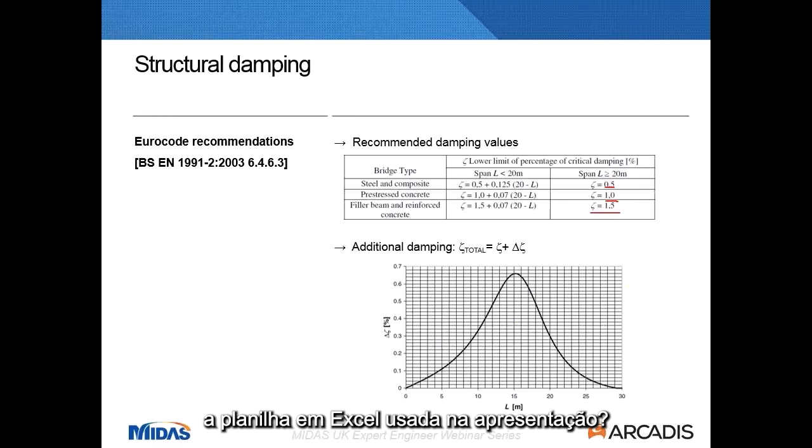Would it be possible to circulate the Excel spreadsheet used in the presentation? I'm not sure about it. It's not because I don't want to share it, but when you share this kind of information, you have responsibility that the spreadsheet is robust, watertight, and doesn't have any glitches or anything else.

This is a spreadsheet I've prepared for myself when working with these kinds of problems. The truth is, it's not difficult to prepare one yourself, and that probably matches your workflow better. As far as I'm concerned, Midas is preparing some additional tools to run this kind of analysis, so it will be implemented in future versions. You can also always contact them for this.

You spoke about underestimating the time step. Can you speak about overestimating it? I understand overestimating it is like saying, I'm going to be safe, so I'll use 0.1 milliseconds for my analysis.

Well, it's not harmful - you can use 0.1 or even less than that. The only problem is the smaller the time step, the longer it takes to run the analysis, and the size of your output files increases exponentially. So you have to be careful.

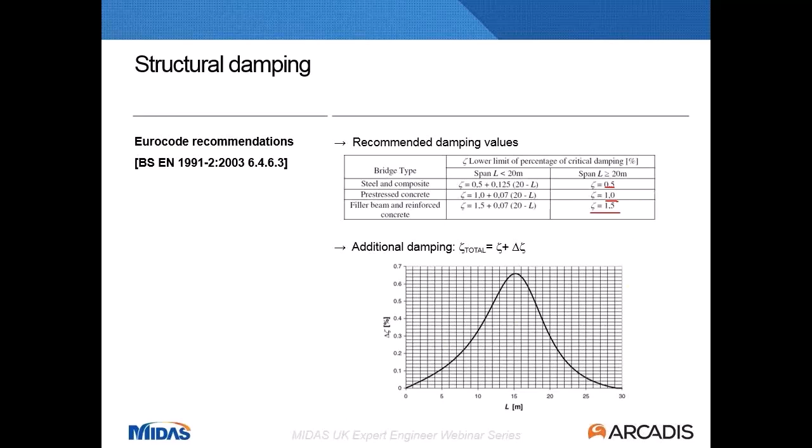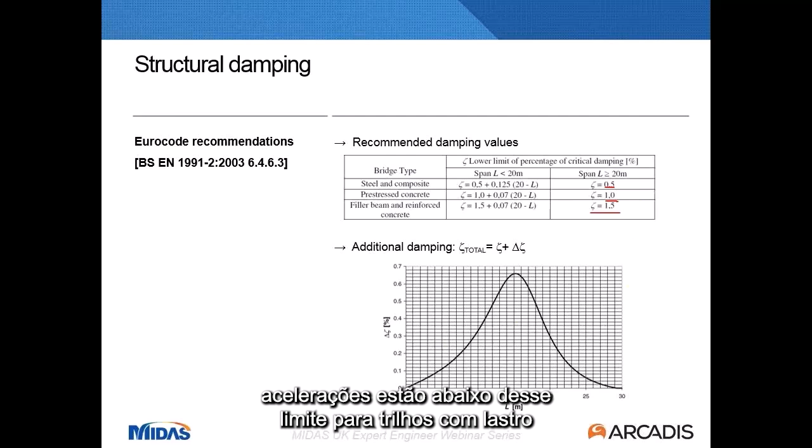What's your opinion on the slab track versus ballast track debate for HS2? I'm not sure I'm in a position to respond to that. Obviously there's an implication for this kind of analysis. But as long as you use the codes and make sure your accelerations are below the limits for ballasted tracks and ballastless tracks, you should be fine. So I understand the debate is somewhere else.

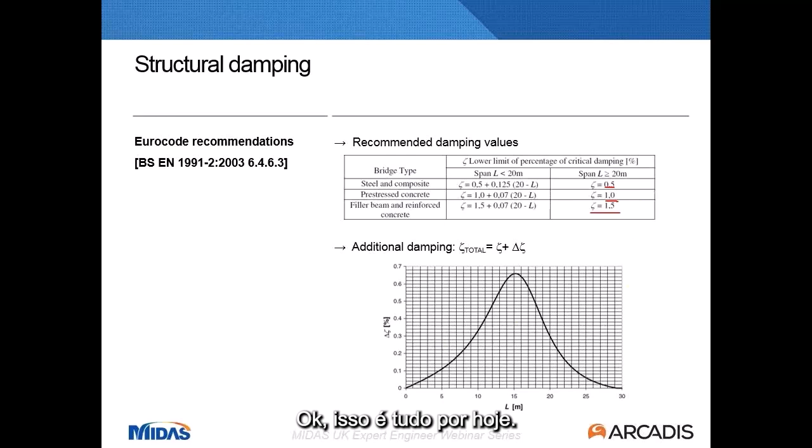Okay, that's all for today. Hope you have enjoyed the webinar.